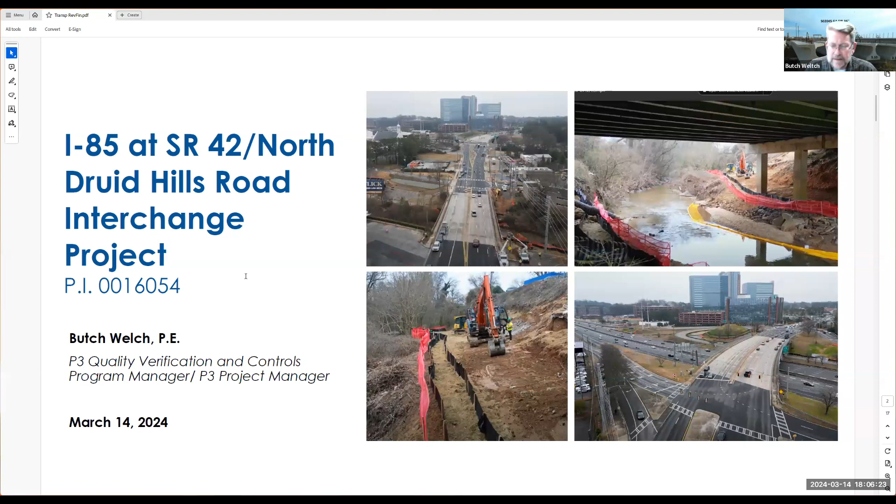Thank you, Commissioner Spears. Hopefully everyone can hear me fine now. This is the I-85 at North Druid Hills Road Interchange reconstruction project. I'll give you a quick project overview.

The purpose of this project is really to reduce crashes and improve traffic flow through the interchange specifically. A couple of items are going to be added. We're adding a displaced left turn for the westbound to southbound movement, westbound on North Druid Hills. You can see the new bridge that will be constructed is where you see the signal. In gold will be the new displaced left turn, which will take that traffic to the southbound on-ramp to 85.

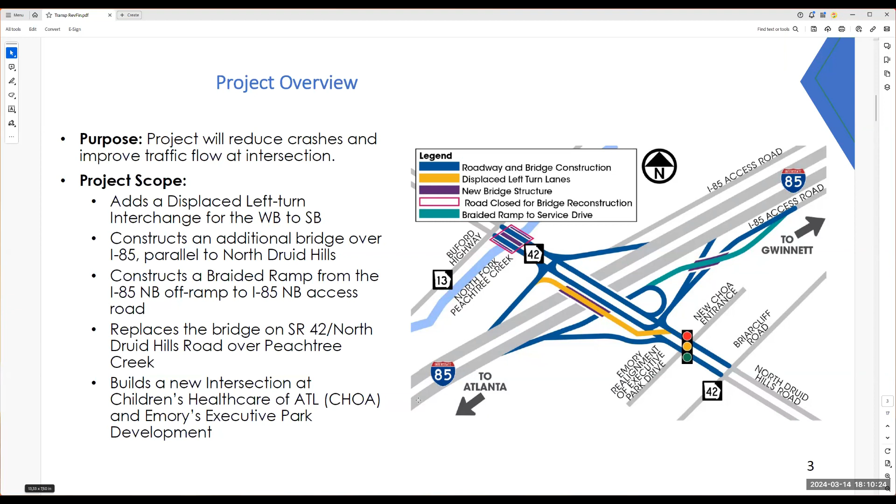There's no questions there, we'll move to the next slide. Just to confirm, you said Executive Park Drive will be right-in, right-out only? Yes, the existing Executive Park, once the newly relocated Executive Park Drive is constructed, will tie into the intersection of the new Children's entrance. Okay, thank you.

North Tarrant Infrastructure was awarded the project. They began work at what I'll refer to in this presentation as Bridge 1, which is the bridge over the North Fork Peachtree Creek. From that construction, which began in late February, the department did a 30-day notification to the public concerning the detour, which would be pending the progress of work for this bridge.

Our contractor decided to try to perform a lot of the preliminary work without the detour, so as to limit activities during the 90-day closure. Part of that was to do all substructure work, as you can see in this picture. We've been hampered by weather, particularly rain delays, which cause the North Fork Peachtree Creek to rise into those locations where the ongoing work is. We did and will continue to have nightly lane closures while the contractor performs this preliminary work. As we monitor their schedule, we'll be able to confirm the exact date.

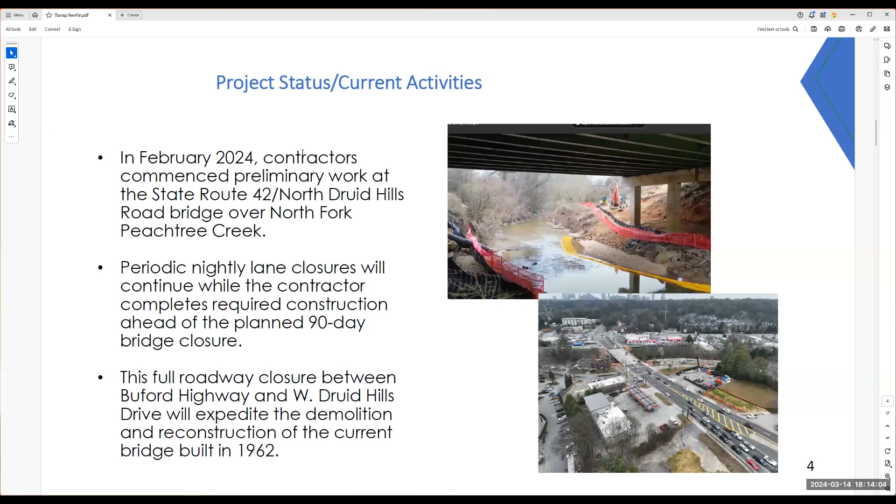Now this is the detour. The detour is approximately 5 miles long. One thing I would like to make clear is that on a state route, when GDOT does a detour, we go from state route to state route.

So what you see here is the state route to state route detour from North Druid Hills. If you're going westbound, you would come off of North Druid Hills, go north along the frontage road to Clairmont, then go to Buford Highway, come southbound. Vice versa, if you were going eastbound on North Druid Hills on the west side of the bridge, you would go north on Buford Highway, come to Clairmont, and then go southbound on the southbound frontage road, come up to the exit ramp, proceed eastward on North Druid Hills.

I know a question we get quite frequently is, what about side streets or other shortcuts for that nature? I just want to let everybody know that West Druid Hills is a private roadway. Corporate Boulevard is also a local roadway. We strongly encourage folks to stay off of those roadways, as they're not designed for the traffic volumes that would be using the detour.

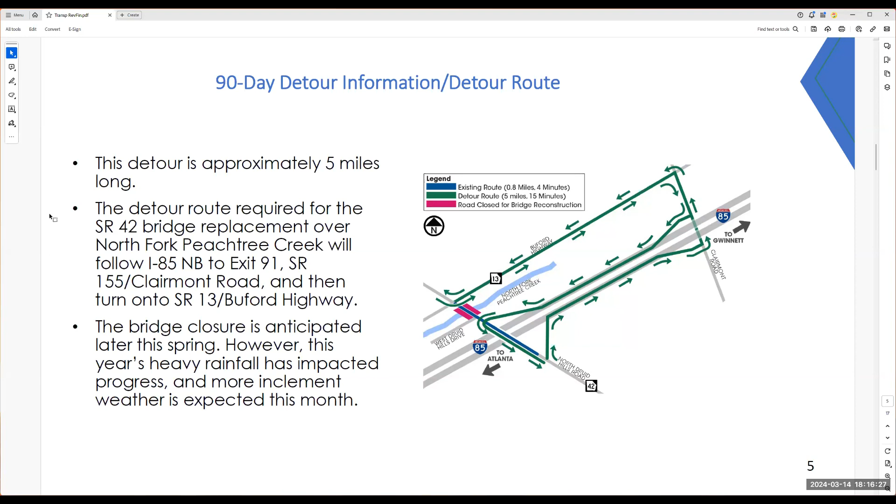And next slide, please.

Also, a point of consideration is the pedestrian detours. There are a lot of pedestrian traffic that go across the North Fork Peachtree Creek bridge. We had this detour route here that shows coming off of the sidewalk where the Salvation Army driveway is, up to the driveway to the parking area for the trailhead. Then you get on the Peachtree Creek Greenway path, go up to Corporate Boulevard, take the sidewalk network to Buford Highway.

And vice versa if you're coming from the Buford Highway side of the west side of the bridge, take the sidewalk network up to Corporate Boulevard, then the Greenway Trail back to North Druid Hills on the east side. It's approximately 7/10 of a mile. I walked it a few weeks ago, measured it out about 15 minutes for your standard pedestrian, but it is a nice walk.

But I do know and understand that it is a little different than the short path that's currently there. The reason we're not showing going along West Druid Hills, once again, is that it's a private roadway and there are no sidewalk facilities on that route.

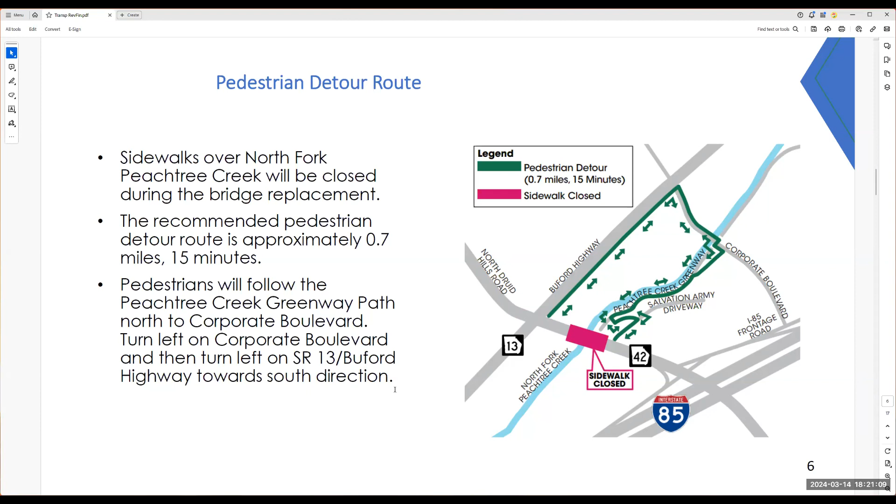Typically, when it comes to the traffic analysis, we use the standard average daily traffic numbers generated for the project. We look at those numbers.

When you look at side streets or local roadway networks, those roads are not designed to handle that type of traffic. And that's why we look at the state route to state route system. I'm not sure if that answered your question, but hopefully that's close to it.

Thanks, Butch. Johnny Wood also had a comment generally about Buford Highway, with the work going on just north of this project and some lane shrinkage. I think that speaks to the collaboration we're trying to do with any work the district has going on in the area. We understand the impact and headaches of the current bridge being out, and the La Vista detour that folks called out.

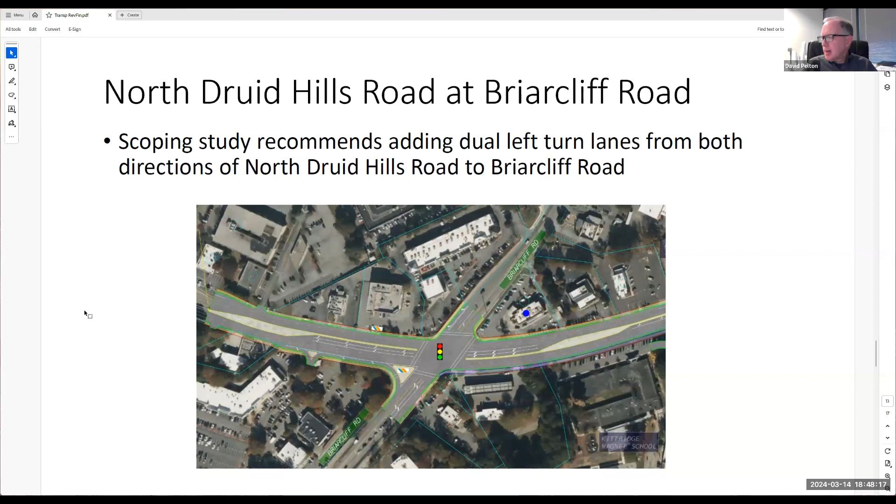The next slide will be North Druid Hills at La Vista. At this location, the study recommended dual left turns both directions on North Druid Hills, as well as eastbound on Lavista Road. This is all in unincorporated DeKalb County. What we're planning to do here is apply for some Atlanta Regional Commission funding in the current 2024 project solicitation, which I think is due in May for that funding.

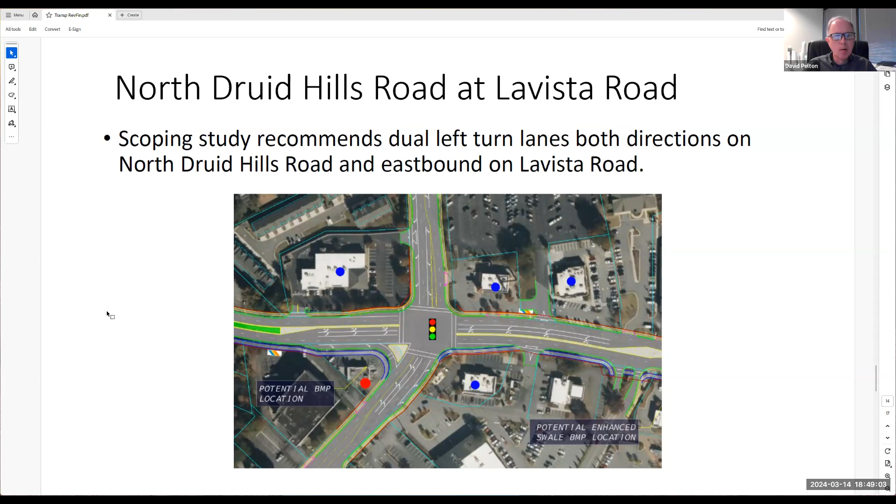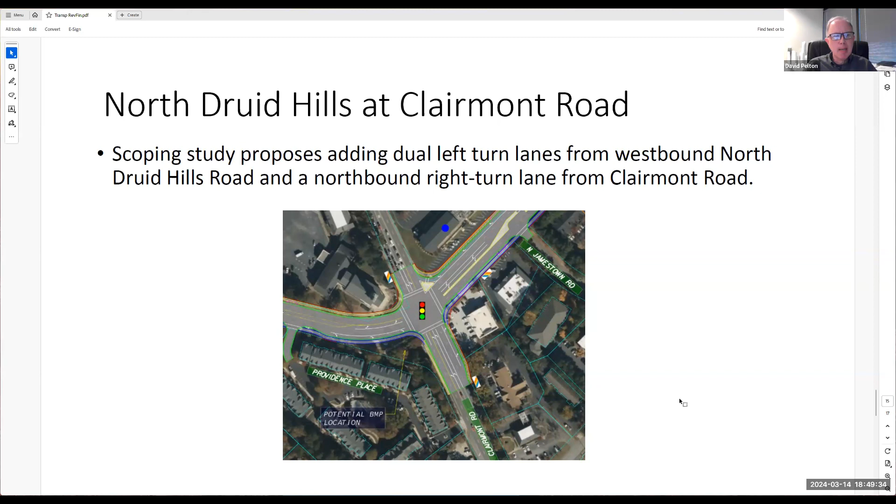That's an improvement we want to try to move forward with. The next one is another project we also want to move forward with. The scoping study recommended dual left turn lanes from westbound North Druid Hills and a northbound right turn lane from northbound Clairmont Road. So we will also apply for funds for this in the May ARC project solicitation.

Next is a project that GDOT's actually working on at Clairmont at Lavista. They're proposing to extend the eastbound left turn lane from Lavista to northbound Clairmont Road.

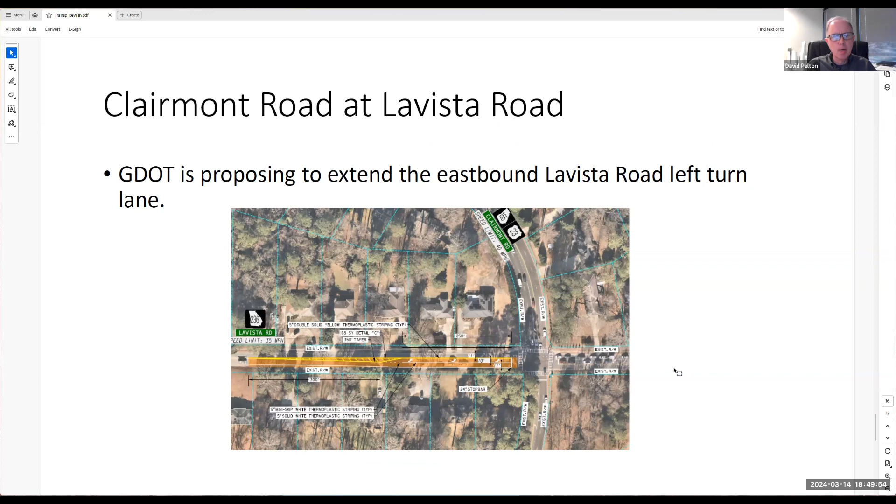One thing I saw in the chat, I think there was a question about what the county is going to do related to the detour and help out with detour traffic. I think once we get GDOT's signage, exactly how they plan to sign the detour, we're going to look at where we may need to provide additional signage. There are certainly locations away from the actual detour that people are probably going to be detouring on, so the public probably needs to be made aware of the detour well in advance of where it's actually going to start.